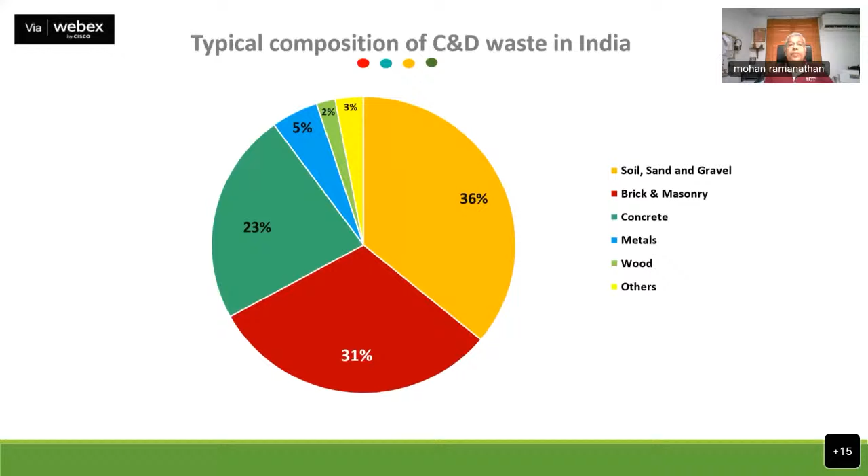Swachh Bharat has also helped, and smart cities have helped. The smart city program also entails that a C&D plant must be established. So you can see a lot more plants coming up all over the country, and they need technology - they start with some technology, but need technology from laboratories like CSIR to make them profitable. This is not a great business venture unless the government pitches in for certain things; it may not be viable for the market value of these products.

I'll explain these points. I'm promoting the use of small recycling plants in India. We don't need very large investments - our volumes are low, so you need a set of equipment which is listed here. They are small capacity. Item number 4 is the key machine, which is 50 to 100 tons per hour with a magnetic separator - this is what we need in small plants.

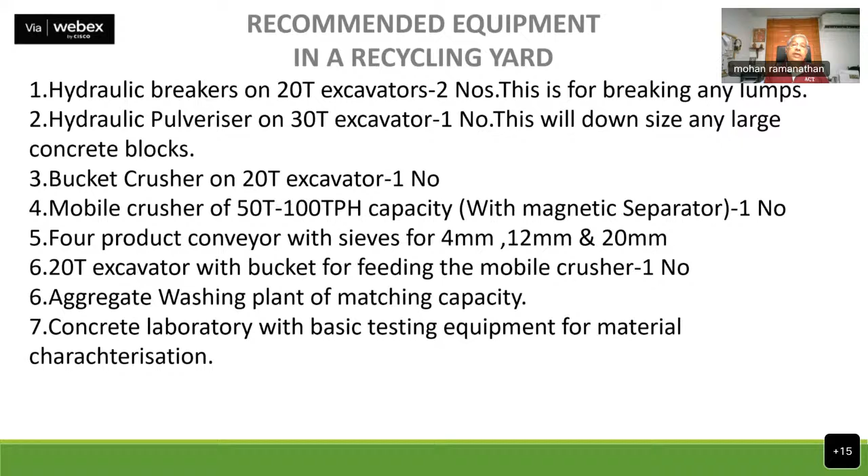So we have to go for secondary breaking in the plant using breakers and pulverizers, and the mixed debris has to be processed through the mobile crusher. The mobile crusher, which I will show in the video, takes in raw material of about 300 to 500 mm lumps of concrete. Then the concrete is processed through the mobile crusher and segregated depending on what sizes we'll sell - we can have coarse and fine.

In South India, river sand cannot be mined, and river sand is scarce, so most people prefer manufactured sand. Straight from the coarse aggregate, from the lumps, it is converted into fine aggregate, so we don't have to tackle the problem of adhered cement mortar on the aggregates. Otherwise that's a big issue because it increases the cement demand.

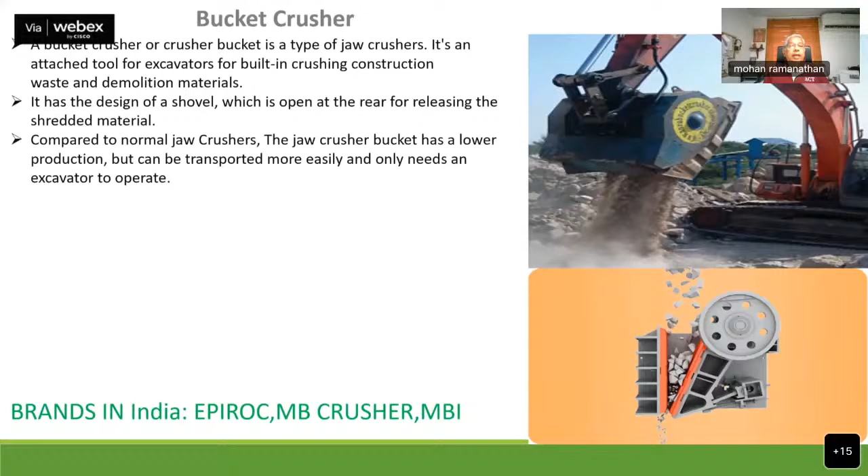Here you see there are many plants, many brands of bucket crushers that I talked about available in India, and there are specific advantages in each.

Can somebody mute? So bucket crushers are very effective, mounted on excavators, and they can do small amounts of... can you all hear me? Just get a confirmation. Yes, sir. Okay, yeah.

So these bucket crushers are mounted on an excavator, and these are simple, inexpensive equipment, and you can start with this type of equipment. This is a hydraulic bucket crusher. These crushing buckets, as they're called, can vary in size, volume, capacity, and intake size. The jaws can be adjusted to produce what the customer needs as the end product.

Then we have the mobile bucket crushers, and we move on to the mobile crusher brands available in India. Mind you, they're all servicing the granite industry and the aggregate industry. They have to change the models a little bit, modify the machines, and they can handle C&D waste. So these simple machines are already available in India in the quarries.

We have to note they may not have magnetic separators for steel, they may not have the products we want. But these are the common and most famous brands available and serviced and sold in India, so there is no dearth of machinery. Of course a few issues like dust production are being arrested by dust suppression systems built into these machines.

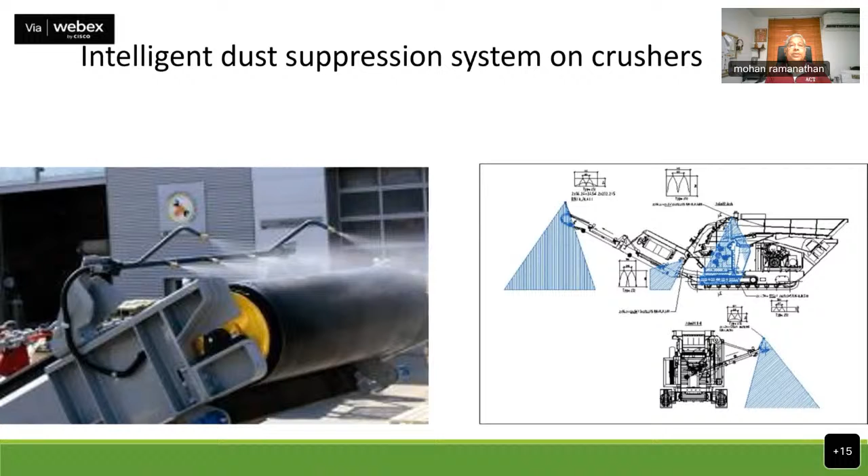So today we have three types of crushers depending on the end product: jaw, cone, and VSI. I'll not go into that, but if you're going for manufactured sand from your C&D waste, you should go for a VSI system - that is VSI, vertical shaft impactor.

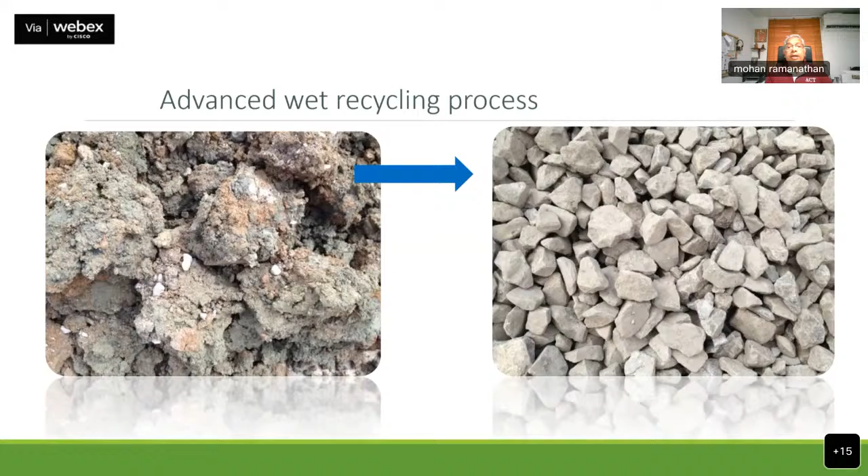So the extracting of the aggregates - I'm short of time already. I just want to show you one video. What you see on the left is the raw material, and what you see on the right is the processed and washed material. And this is the aerial view of a mobile recycling plant with a washing system.

So you can have three products of coarse aggregate and two products of fine aggregates, all coming from the plant. It starts with loading the crusher here, loading the mobile crusher, and then washing it here. These plants - I told you there are more than 20 plants working in India. It's not new. We also can have a simpler type of washing system.

So I have a short video to show you, which will explain the demo we gave for Chennai Metro Rail, where about 30,000 piles are going to be installed. We wanted to educate them that pile heads can be recycled because it's pure concrete and it's quite simple. Here you will see a mobile crusher with the separator system.

I'll not run the whole video for want of time. This is the mobile crusher. This is a 3-part screen, and this is the after - you can see it yourself.

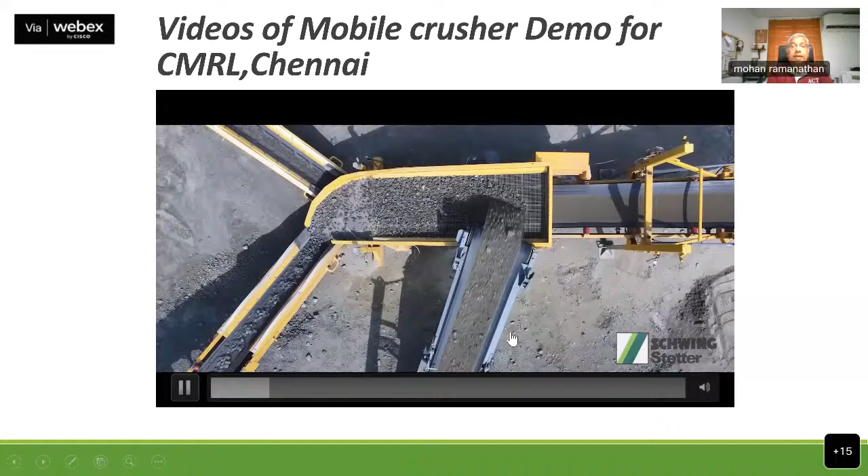This was a demo in Chennai for the Chennai Metro Rail. This is a drone video, and the target was to ask them to give the pile heads - about 30,000 pile heads - for recycling. This has to come in the specifications of the tender. I'm also talking to Engineers India for a very large refinery in Rajasthan, where about 50,000 pile heads are available for recycling, and they are very keen to introduce such measures.

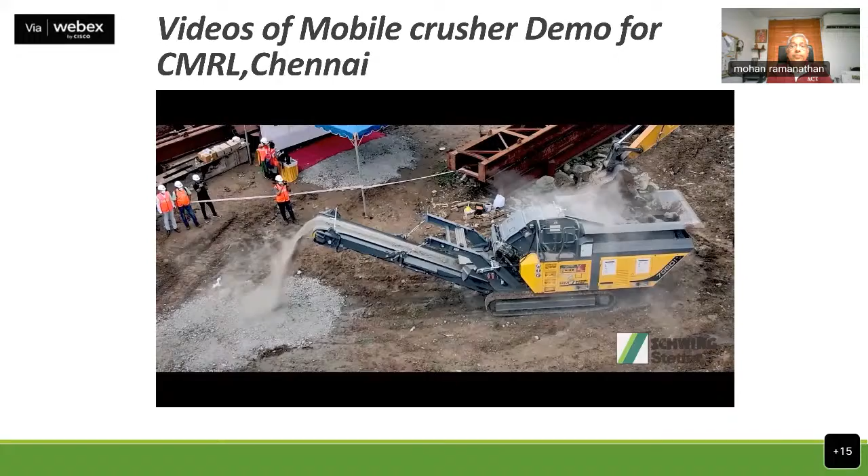So this is a simple mobile recycling plant, 70 tons per hour. It's fed by an excavator, and then the products are separated by screens, 3-part screens. So this is the three-part screen where three products come in.

We'll stop here for want of time and move to the next slide.

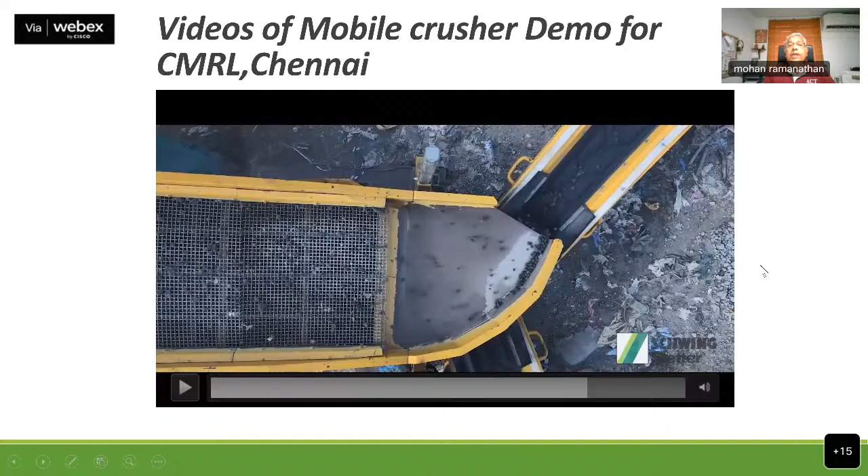Now a little bit about the modifications to IS-383. IS-383 for aggregates have been modified to adapt the C&D waste material. The two terminologies are RCA, recycled concrete aggregate, which comes from concrete, or recycled aggregate, which is mixed with brickwork and blockwork and all that. The code is very clear about it, and now enables contractors and consultants to use it.

In India, there is a lot of hesitation to use this kind of material mixed with virgin concrete, but it's possible. A large amount of demolitions are happening across India, and wherever I am involved in large projects, I'm trying to promote, first convince the owner and then the RMC plant to use this as per the IS code. This is a large demolition done in Cochin, Maradu, where we recycled almost all the materials into some products, maybe blocks or washed aggregates.

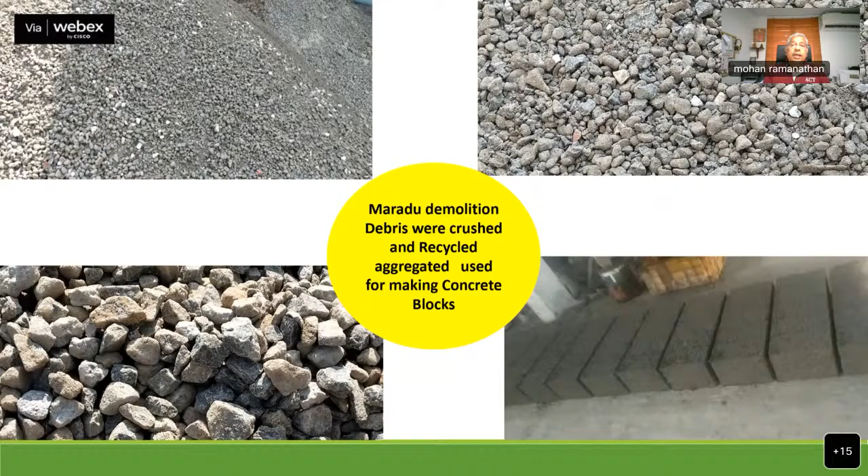So there are many uses for this, and it's all in the literature. In India, CRRI is already using it as sub-base. The plants in Delhi are using them for many non-structural products. But I'm yet to see structural products coming out, which as per IS 383 allows them, or as per the Government of India rules, which are very clear.

So we can use it as a road sub-base very safely. We can use it for low strength concrete. These are the things allowed, and we can use it as sub-base for sports facilities. And we have enough guidelines.

There are guidelines and books published by many organizations. Indian Concrete Institute has its guidelines. Building Material Technology, BMTPC, has their guidelines. Pollution control boards have got their guidelines, all addressing the C&D waste scenario. So it's only a question of the consultants and owners accepting it.

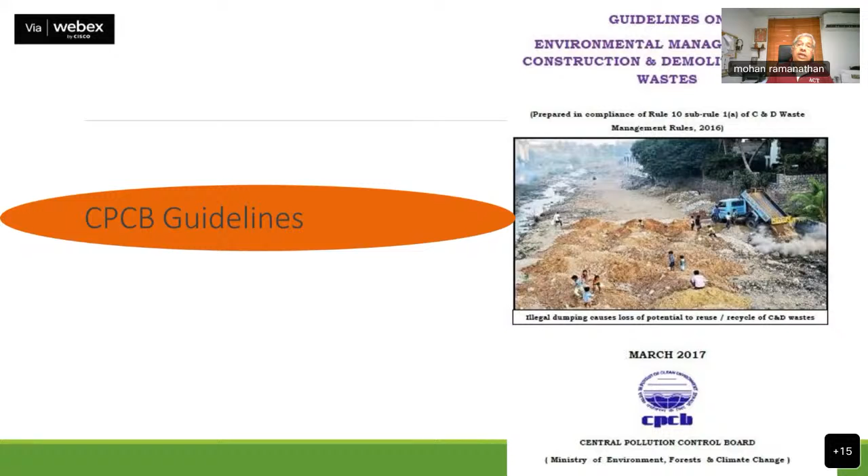And if it's a non-structural concrete less than M15, we can use 100%. So you can go through the code yourself. The code has enabled this very clearly, so we must take advantage of this and go forward.

And some of the applications we can use the recycled RCA or RA aggregates for, there are plenty of them. I've already exceeded 5 minutes of my time, but it's impossible to cover this subject in 15 minutes because this is only a plenary talk. I'll see if I need any other important slides.

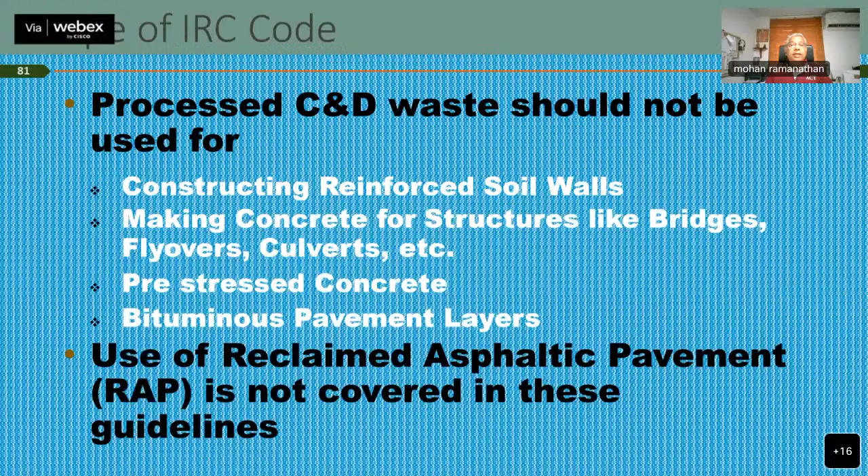Yes, in India, I have seen a lot of landfills being made on good fertile lands being covered with this. So we should stop this. We should use this material back into our system. And our rivers are getting choked. We are learning this, so the careless use of this material by the public and contractors, people from our own industry, we need to stop.

And we have a solution. The laboratories represented here have solutions, but there must be a way to take it to the public. There's enough research going on. CBRI Roorkee, I know personally, have done a lot of research on this. So there is no dearth of technology, no dearth of material, no dearth of equipment, no dearth of government trying to push it. But it is the consultants who have to specify this in real practice.

This is a problem which is going to be there, which is the adhered cement on the aggregates. So this is the Burari plant in Delhi.

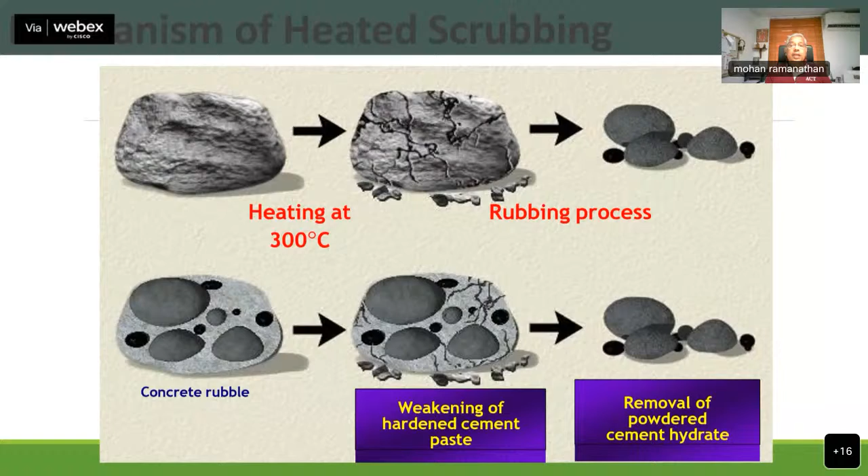So we should proudly display our products like they do in Hong Kong and other cities. This is from the Burari plant in Delhi. So there are a lot of success stories in India itself, but we need more of it.

The Parliament building has used it, CPWD have used it in the Parliament building here.

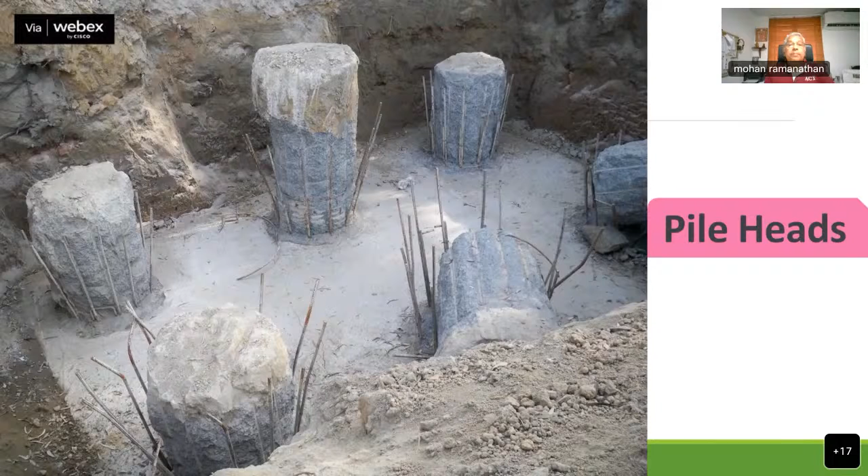sustainability. This is an important thing: we have to make sure that the energy that we have in the C&D aggregates is put to use. So these are the energy sustainability numbers of how much we pollute the atmosphere and how the recycled aggregates can reduce to a certain extent the pollution and the carbon emission from our systems.

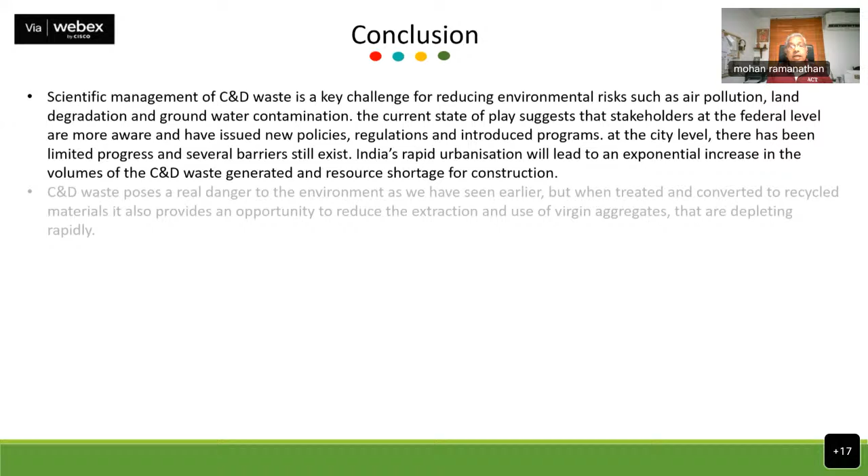So there are a lot of benefits of recycling. We quite well know that, and now I think we should scientifically manage this. Otherwise, it can go in the wrong direction also. A few collapses of buildings using C&D waste will simply kill all the things that we have done so far. So with this, I will stop my talk, and I will say this is not the end. It's only a beginning of recycling.

You mentioned that C&D should not be called a waste, but it is a resource. So I think it's a very good message that you have given to all of us. And you have also highlighted the importance of several such materials like RCA and RA. Our next speaker will also highlight some of the works that they have been doing. I see Dr. Santa Kumar and others, those who have been doing work in the area of construction and demolition waste as a resource. Thank you very much, sir.

Once again, Dr. Ashok Kumar, should I move forward with your permission? Okay. I can't hear you, but yes, okay.

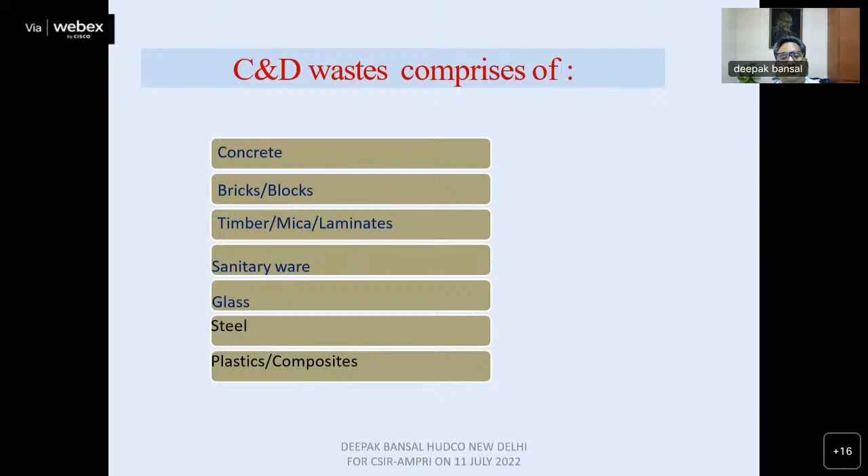Generally, construction and demolition waste comprises concrete, bricks, timber, sanitary ware, glass, steel, and plastic. And we know from the previous presentation that most of the construction and demolition waste is brick, blocks, soil and concrete. Delhi generates something like 6,000 metric tons of municipal solid waste, which is too high. So with waste, we can reduce it, we can recover it, and we can recycle it.

Generally, the present status of solid waste disposal is that either it simply lies on the site, or it is dumped in the open, although this is not allowed. It is sent to landfill sites, or dumped on eco-fragile zones like riverbeds and water bodies, which further contaminates the environment.

Now, different researchers have given the volume of construction and demolition waste. For new construction, somebody says 5 to 25%. For repair and renovation, somebody says 10 to 25, 30%. And the major part of construction and demolition waste comes from demolition of buildings.

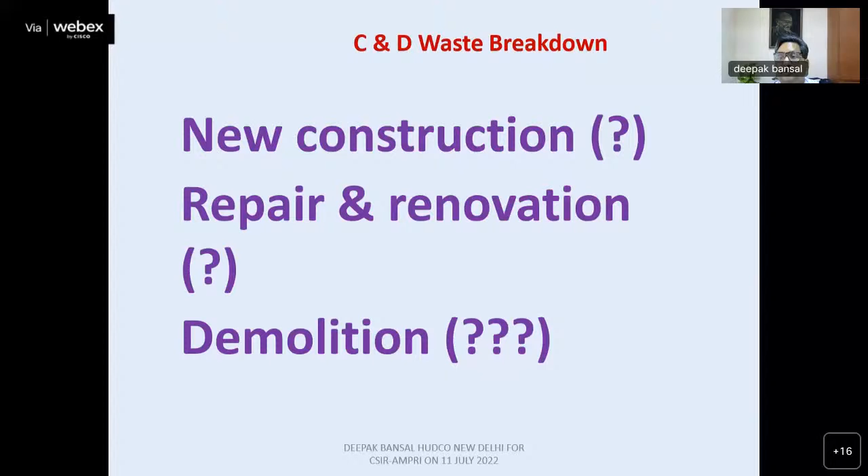But the traditional knowledge available in the Indian building industry is to recycle it using the local people. Like in Ahmedabad, what is happening? In the pol, all the heritage features in the buildings like balustrades, railings, doors, and window members are being recycled and sold. And they are fetching good value, and they reduce the load on construction and demolition sites.

The percentage of solid waste has already been discussed in the previous slides. So I believe that reduction of construction and demolition waste can be done by efficient planning of construction, if we can reduce the wastage and pilferage of materials like bricks, soil, sand, aggregates, and steel. Normally the percentage of wastage in steel is 2%, but in bricks, soil, sand, and aggregates it is 5 to 25%.

Now the Indian code has allowed replacement of natural sand with manufactured sand up to a certain percentage, depending upon the qualities. The same is for coarse aggregate also. Now I have come across some people in Ahmedabad and Maharashtra who are making surkhi bricks. They are taking crushed brick powder, sand and aggregate, putting some lime, gypsum or cement in that, and making the bricks.

The performance of these surkhi bricks, although they are not much known outside, is much better. The crushing strength generally is about 50 kg per centimeter square, which is the dry crushing strength.

And the water absorption, the weathering, the toughness, the surface finish are also good. The replacement of virgin steel with recycled steel is also now prevalent. I believe that steel industries are recycling 10 to 30, 40% of steel in making the new steel. So this reduces the consumption of raw materials, as well as reducing the cost and embodied energy of the new products. The performance of this steel can be made as per the desired level.

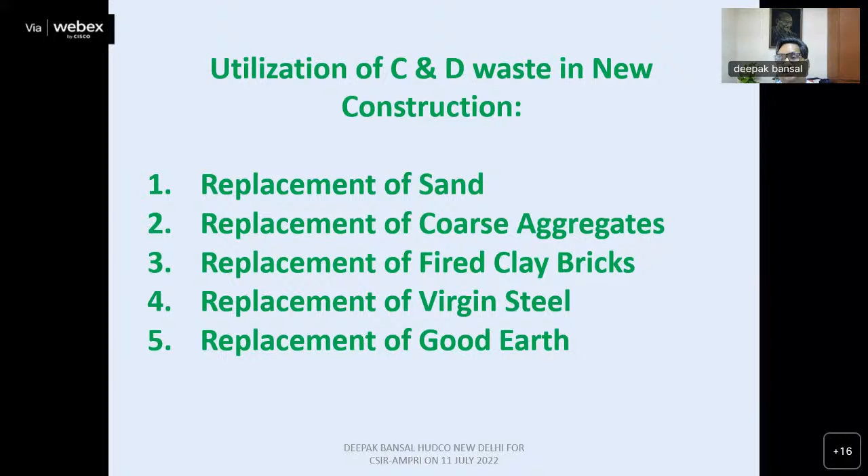Some new products are being used, and at my personal level I have used products from other waste, not construction and demolition waste, but sometimes agriculture waste also. I've used sugarcane bagasse ash bricks in Nagpur. VNIT Nagpur is doing good research on that topic. Bricks from rice husk and bricks from red mud have already been experimented with a lot, and have been used partly where raw materials like bauxite mines or iron mills are there.

Recently, I came across municipal waste sludge and pulp and paper waste being used to make bricks. IIT Guwahati has done some work on this topic, and they are in the process of recommending an Indian standard on that. The performance of the brick made from this municipal semi-solid waste is found to be good. Bricks and partition panels from phosphogypsum have been used for a long time. Construction and demolition waste is largely being used for making tiles, and they are very good in that.

But the trouble is that, from my personal experience, people are not very comfortable using them. I do not know why, because the performance of these products is much better, but probably because of limited supply or limited sources or locations. So maybe transportation or logistics may be an issue. So people are not using it the way they should have by now.

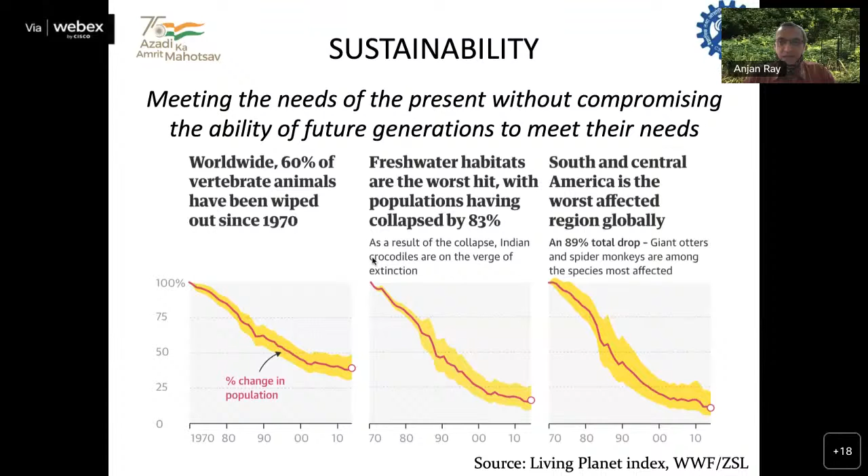Very simply, sustainability is about meeting the needs of the present without compromising the needs of the future. And we have not done very well as a planet. 60% of the vertebrates that were there in my childhood in terms of species are gone. And the two basic rules, that we should not harvest things beyond the regenerative capacity, and we should not deplete non-renewable resources without substitution, have not been well maintained so far. These are very simple rules. If we keep them on our wall, as I do, and every morning you look and see whether all the work that we do is aligning to these, you can actually get a more sustainable planet.

The core issue is overconsumption. Whatever the earth needs versus whatever is actually extracted is poorly balanced. So, you can ask the question, does anybody need 29 pairs of shoes or 30 shirts? And then you start seeing that maybe the answer is no. But for everything that you overconsume, there's an overconsumption load on the 4 basic natural resource blocks that the world deals with. And in 250 years of progress, we can see that every parameter has gone up. So as we have measured GDP progress, we have also extracted resources well beyond what the earth can sustain.

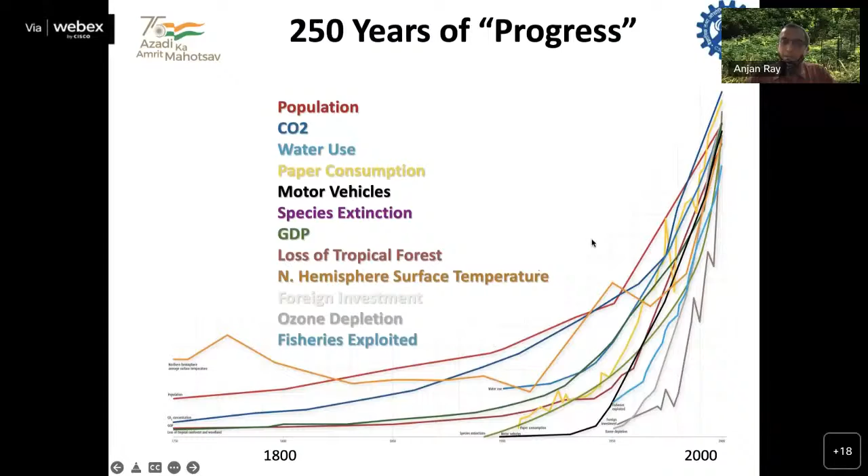So if I look at this from an Indian imperative, and I use this phrase resource efficiency, which I encourage all practitioners of waste to wealth to examine, it's simple mathematics. Can I get more output from less resources or more output from given resources? And that is where all the work that's been talked about this morning and all the 4 technology presentations that will follow me will focus. But as we measure the resource efficiency, we will be able to choose which technologies are better and which ones are worse. For example, when we do crushing, it's a good thing that we're recycling. But if I'm using a lot of fossil energy for that crushing, then maybe we need to re-examine that part of the recycling value chain.

We've talked about these 4 basic material resource categories. Today, we are mostly in the non-metallic block. But with things like red mud, we might also be in the metallic block. We should remember where we are in terms of our achievements, and also keep measuring at all times how we are doing against these metrics. In particular, the abiotic resources are not used for energy production. And also for everything we are doing on the resource recycling, reuse, etc. side, we might be consuming water and other things that we must be attentive to, because we should not create another problem while solving one problem.

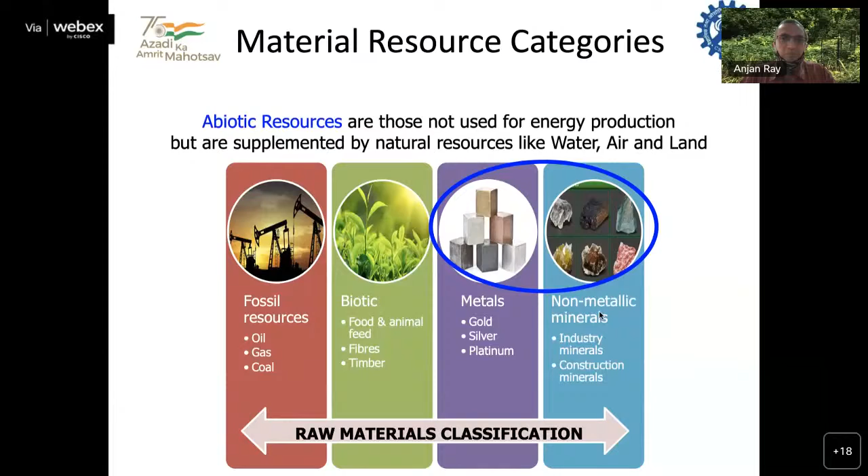Another interesting issue is that when we overconsume, no matter how we overconsume, we overuse machines. So in a very simplistic way, we can say that machines enhance greenhouse gas emissions because no machine is 100% efficient. We've learned from class 7 physics that all machines have less than 100% efficiency. Therefore, in theory, a lubricant is a fighter against climate change. Does every machine, including construction machinery, demolition machinery, JCBs, hammer mills, are we using the best lubricant? That itself is an important consideration for managing the footprint of our emissions. These are the things that I would like to draw your attention to.

What we heard from Dr. Anandavalli was about resource efficient recycling. She gave the example of red mud. What we see in the building industry is we've moved away from buildings that look nice. You know, they're all glass fronted, sun facing. Today, we first look at functionality. How do I make the building functional? Then we look at adaptive aesthetics. We have moved from thinking of buildings and communities as energy hogs to thinking of them as energy generators. Planting trees, not only for landscaping, but actually for sequestering carbon. And like I mentioned, renewable energy to drive machinery and using bulk inert inorganic wastes, not so much in landfills, but as carbon capture reactants.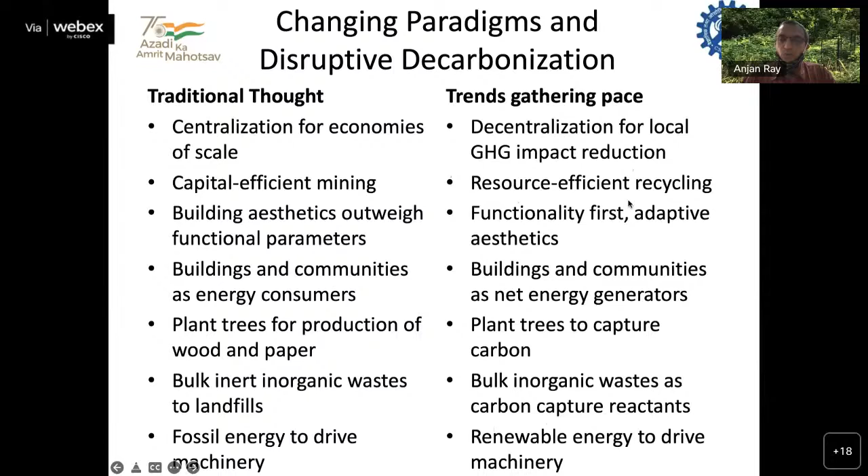If we are able to achieve all these different things that we're talking about and foresee a future where we not only reduce, reuse, and recycle, but we do so responsibly and in a resource efficient manner. So I'm adding 2 R's to those. We could potentially leave behind a more sustainable world than the one our generation has inherited.

Saying that, we will recognize that sustainability is an imperative, it is not an option. And if we start thinking of wastes as underutilized resources rather than wastes, we get a better position on sustainability. We also need disruptive thinking. Only incremental thinking will not get us there.

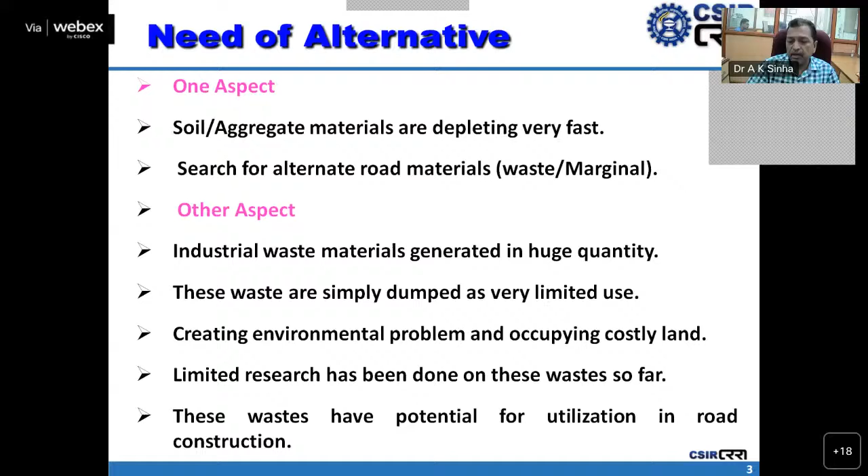So in one aspect, due to large infrastructure construction, soil and aggregate materials are depleting, and we have to search for other alternative materials. On the other hand, copper slag waste material has potential as a road construction material. Presently, it is partly utilized in road construction and partly simply dumped near the industries. Some barriers and challenges are persisting, which hinder the application of copper slag as a road construction material.

There are no proper guidelines as per MORTH guidelines, or even any construction methodology. Performance and durability data regarding the materials are not available in documented form. There is even a lack of skill, lack of knowledge of the performance of engineering materials, lack of awareness, all persisting, which hinder the application of copper slag materials.

So a broad sequence of studies was carried out in the laboratory as well as in the field. First of all, it was examined whether it is a hazardous or non-hazardous material, and it was found that it is a non-hazardous material. Then engineering properties were determined as per the standard procedures accredited by the Indian Roads Congress. After that, a pilot study was carried out and 3 years performance was monitored, and based on that, guidelines as per the IRC are under the development stage.

So copper slag was studied as an embankment material or as a subgrade material, without mixing with other materials, or with stabilization, mechanically stabilized with soil or pond ash, as a replacement of soil.

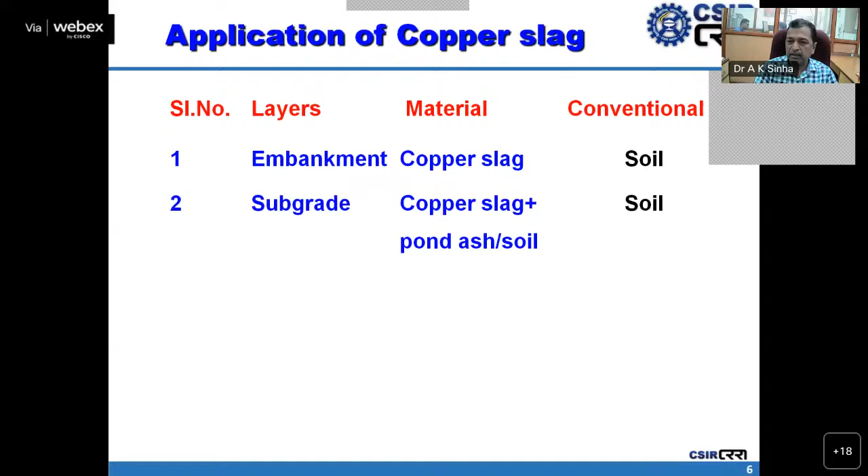Pertaining to road construction materials in application of embankment or subgrade, properties like grain size, liquid limit, plasticity index, dry density, free swelling index, CBR, and shear strength parameters were determined for embankment and subgrade application. The whole methodology was bifurcated into two stages: laboratory studies and field studies.

In laboratory studies, complete physical, chemical, and geotechnical parameters were evaluated, then to improve the properties mechanically and chemically, it was stabilized with cement or as soil materials. After getting all parameters, design and stability analysis of the embankment was carried out, and based on that, a pilot study was carried out using copper slag as embankment material, followed by economic analysis and 3 years of performance monitoring.

Physical and chemical analysis like SEM and XRD were carried out. These are the SEM photographs, showing this is a coarse grained material.

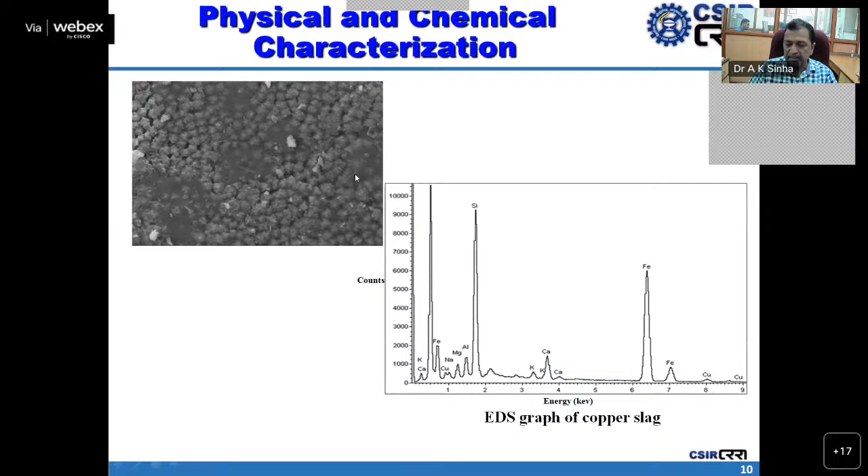So it was blended with pond ash in different percentages from 25%, 50%, 75%, and it was found that after blending with pond ash, density reduces slightly with the addition of pond ash.

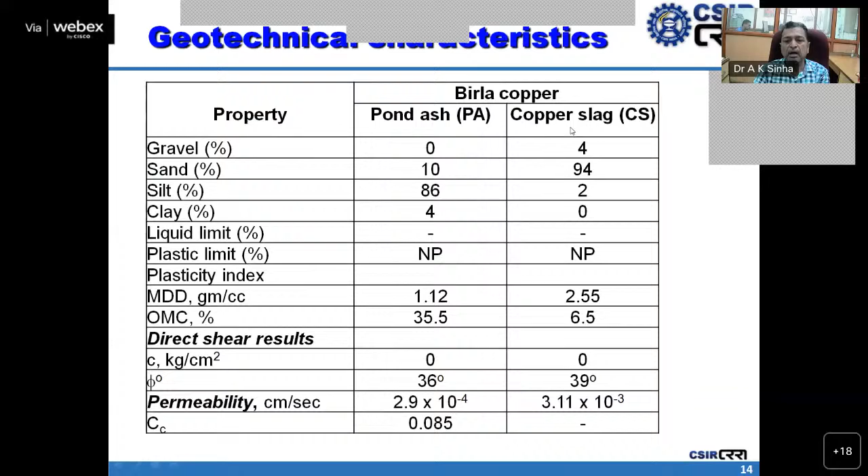Copper slag was also blended chemically with cement in different proportions, 3 to 9%, and it was found that UCS value increases with curing period as well as with cement content. These are some of the properties of pond ash and copper slag collected from Birla Copper Industries.

At the ROB, on the right side copper slag was used as embankment material, and on the left of the ROB, the embankment was constructed using conventional soil materials. Both approaches, 500 meters each side, were used for the experimental test section.

This is the existing site condition on the left hand side, and this is the right hand side before the construction of the ROB approach road.

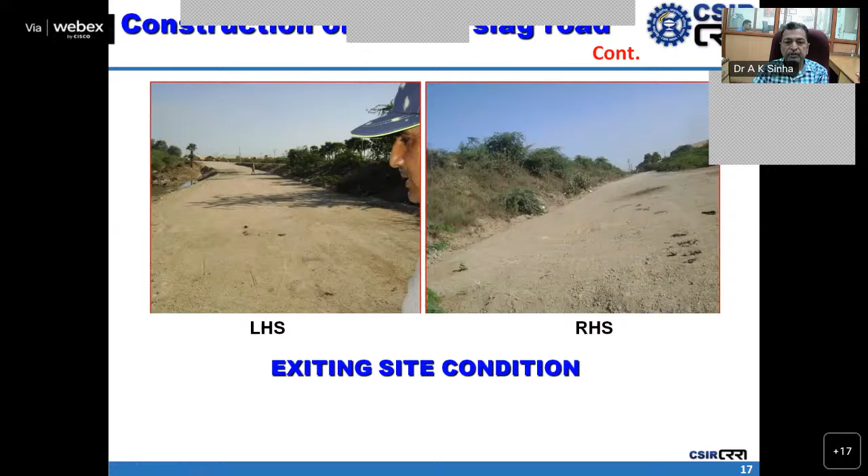In one approach, copper slag was stacked, then spread and rolled out, and you can see one layer compacted here. But when a loaded truck plied on this for the second layer, under the wheel the copper slag was seen to segregate.

So it means we examined how the technical parameters pertain to subgrade and embankment material, but practically it was found not to be feasible as is.

So to increase the cohesion between particles, it was decided that it would be blended with soil or pond ash materials to increase the cohesion properties.

For mixing of copper slag and locally available soil, different indigenous equipment like tractor-tow disc, tractor-tow fowler, and grader were used to determine the efficacy of mixing. It was found that the tractor-tow fowler is efficient and mixes properly.

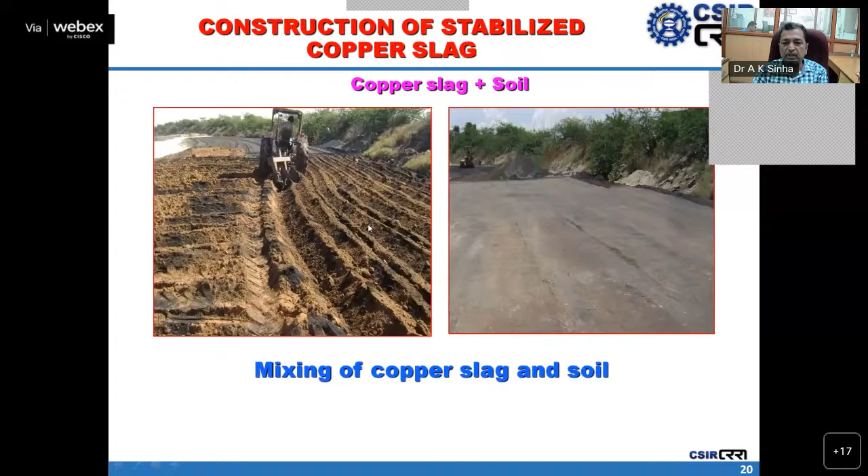This is the pictorial view of the copper slag mixed with soil during the mixing operation, and after compaction, these are the pond ash copper slag layers. The whole construction was done using copper slag and pond ash.

This is another view - you can see it is a frictionless material. So to protect the slope from erosion, locally available soil was used to protect the slope of the copper slag fly ash embankments. This is the existing ROB approach road.

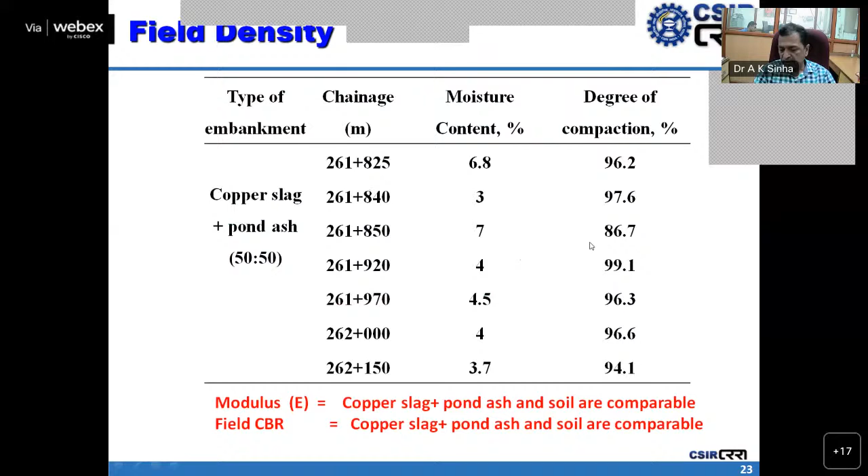During the construction, layer by layer, each layer's density was measured, and it was found to be coming more than 95% as per the IRC guidelines.

During the construction, the modulus of the embankment layer was also determined using plate load test, and field CBR was also determined using the DCPT test.

After the whole construction, performance monitoring was carried out by measuring different parameters like roughness, deflection, and settlement.

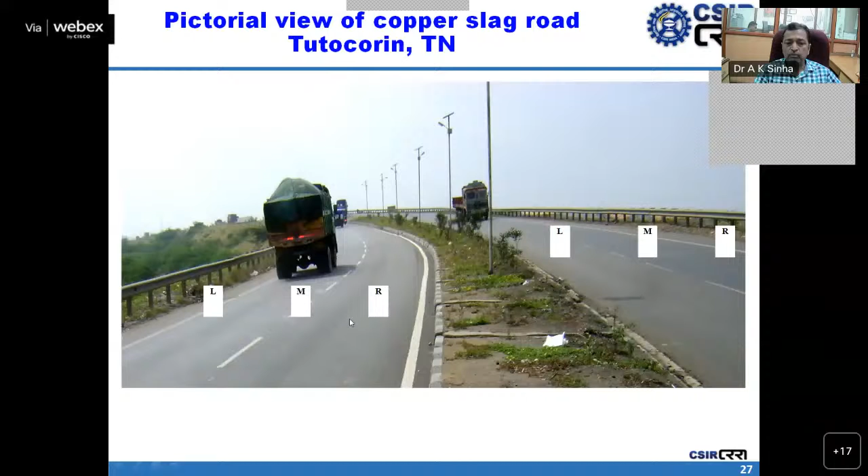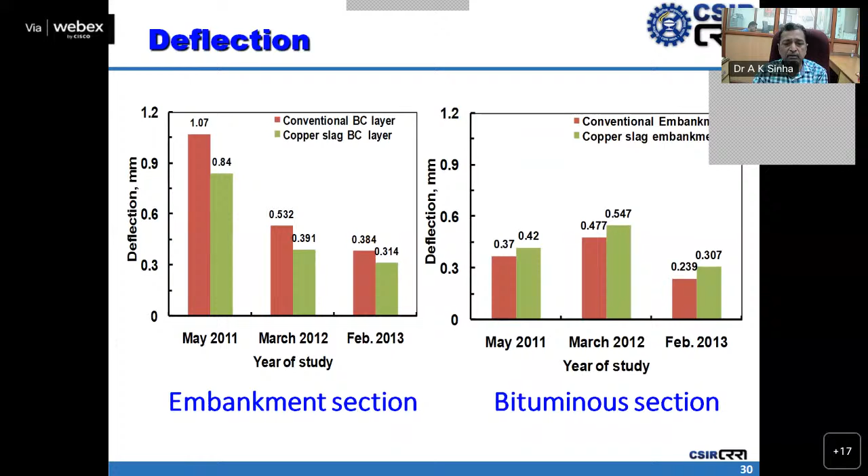Settlement was measured time to time at middle, left, and right also. After the whole construction and performance study, economic analysis was carried out considering different parameters, and it was found that around rupees 2.75 lakhs can be saved for 2.5 meter high embankment construction.

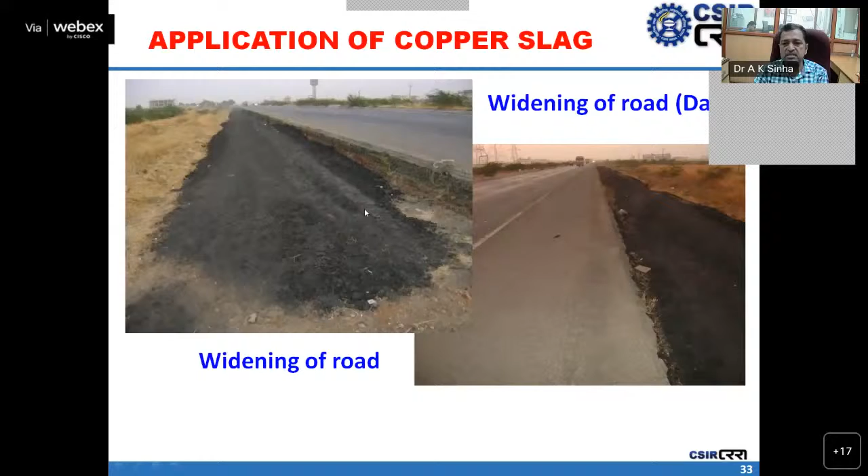Now copper slag is being used as road construction material. This is a pictorial view of the copper slag application at the widened portion near Dahej. After that, I received a SKOCH Award in 2018 based on this study.

From this conclusion, we can say copper slag essentially should be blended with locally available soil or pond ash for application as embankment material or subgrade material. Mixing by tractor tiller is practicable and economical. Pond ash needs to be laid first before the copper slag layer, and deflection and roughness parameters of copper slag embankment are similar to conventional sections, so it can be used as embankment and subgrade material.

Already IRC SP 121 guidelines for use of iron, steel, and copper slag have been developed, but only for rural roads. For highway construction, it is under development, so the printing may be finalized in 2 or 3 months. Thank you, this is my presentation.

Thank you, Dr. Sinha, for your wonderful presentation. I'm sure this is one of the very good examples of research from lab to land. We always say that technologies developed by scientists are being utilized in the field. Dr. Sinha has very nicely given the example of a national highway, the Madurai-Tuticorin Expressway, and appropriately mentioned the usage of copper slag with pond ash and soil. One of the recommendations of his outcome is that copper slag must be mixed with soil and pond ash, used for both embankment and road construction.

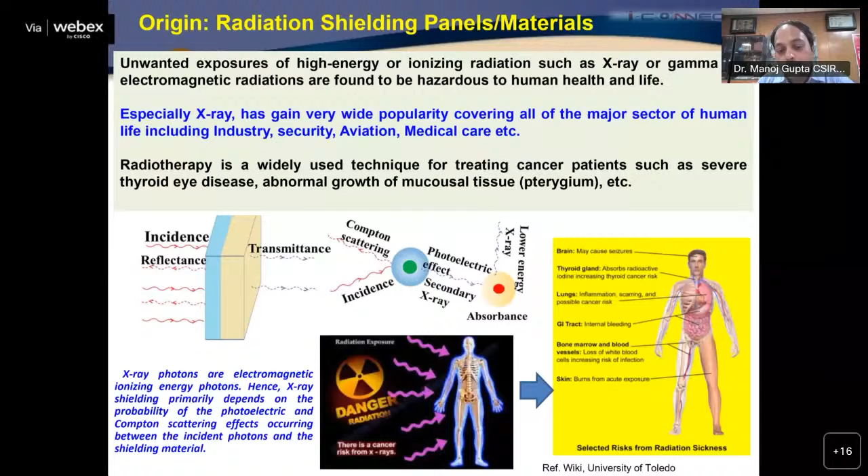So we need to immediately find some kind of material that must be lead-free. Presently, what is happening is we are using lead. Why? Because it has a high atomic number, high density, and also good linear and mass attenuation factor. But it is very toxic and also very costly.

Making these kinds of lead panels requires a high energy, high temperature process. And also when we use lead panels, they have a brittle nature. So after 1 or 2 years, a lot of fractures are created that again cause unnecessary exposure to radiation.

So every 2 years or 1 year, BARC or AERB must visit the respective X-ray room to validate whether this lead is working currently or needs to be replaced. So we need to find an alternative to the lead-based panel.

Lead glasses, doors, or aprons are mainly based on lead materials. Other materials are also available like tantalum, bismuth, tungsten. These kinds of materials are also utilized to make panels, but they are very costly and have a metallic nature.

Another drawback is that sometimes when more than two different kinds of metal oxide mix with polymer materials, it requires proper mixing to have better interfacing at high temperature. A cement-based concrete with a very thick volume is used to protect against X-rays, but it cannot be used as a door or panel and also exhibits high water absorption.

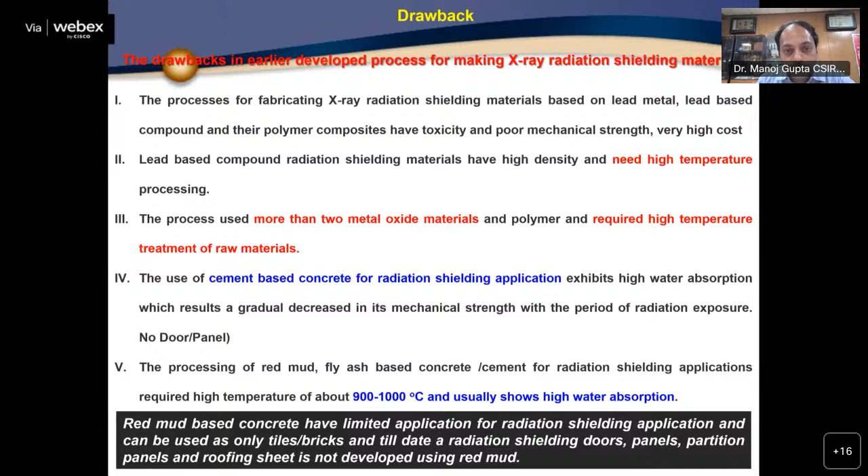With this aim, we have developed X-ray radiation shielding doors and panels with very low water absorption and high strength capability. We have measured the half value layer, which is a primary requirement to validate whether the product has X-ray radiation shielding property or not. High tensile flexural strength with low thermal conductivity was obtained in our developed technology.

To develop this technology and product, we have utilized red mud, which we all know is a solid waste produced in the process of alumina generation from bauxite. More than 13 million tons of red mud is generated from many industries like Nalco, Hindalco, Vedanta.

Most of the red mud contains more than 30 to 35% iron oxide. Once we produce alumina from bauxite, we need 3 tons of bauxite that produces 1.3 to 1.5 tons of red mud and just 1 ton of alumina. This means waste generation is very high, and it is always an alarming issue.

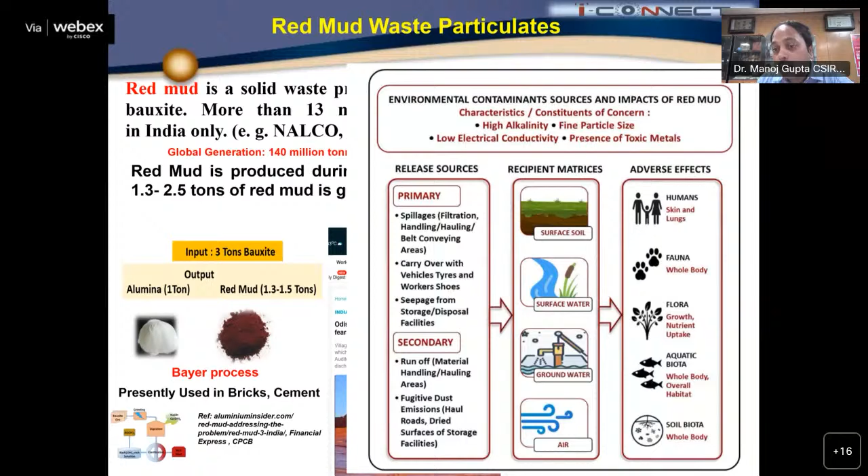Generally it is just disposed outside, and only a small quantity is used in cement or bricks. In villages near red mud generation sites, a lot of diseases occur, like skin and lung issues affecting the whole body.

So before producing our developed product, we did initial characterizations on the red mud. We performed X-ray diffraction and found that it has hematite and gibbsite phases. We also did WD X-ray fluorescence spectroscopy to find out the elemental analysis.

We come to the conclusion that iron oxide is 33.9%, then alumina, titanium oxide, sodium oxide, and the particle size of this red mud was in the range of 0.5 to 150 micrometers, and it has a density of 1.2 to 1.8 grams per cc. And you can see the water holding capacity is also more than 30 or 40%. It means once it is disposed of in open land, it can transfer ions from soil to the water and also to agricultural land, which creates other problems.

So after a lot of optimization and surface modification of the red mud through the compression molding machine and other processes, we have developed these kinds of blocks. You can see this is the size of 10 centimeters by 10 centimeters, also 4 centimeters by 4 centimeters, with a thickness of 1 mm, 2 mm, and 5 mm. We have developed this kind of product, which has very low water absorption and high mechanical strength.

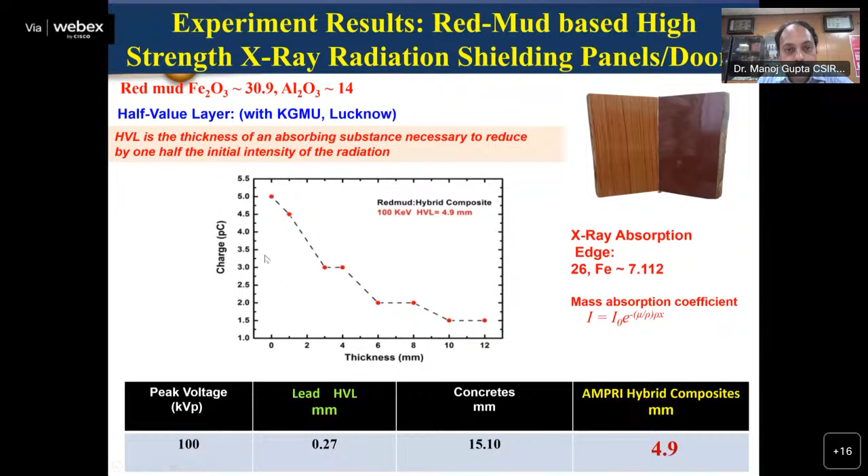Then another parameter: if we use other metal oxides with very high thermal conductivity, then scattering is another problem. When X-rays interact with any metal, different kinds of scattering occur. So our material must have low thermal conductivity. You can see that the thermal conductivity of the board is in the range of 0.55 watts per meter Kelvin, very low thermal conductivity. It means it has thermal insulating properties.

And also the dielectric constant, whether it is electrically polarizing or not. The dielectric constant is also very low, about just 50, meaning the chances of polarization are very poor. So it means better X-ray radiation shielding properties. Most of the X-rays are absorbed within the material without producing a lot of secondary X-rays. And the density can reach up to 1.8 grams per cc.

Now, to validate whether iron oxide or titanium oxide has the capability to protect against X-rays, we fabricated two panels, one with marble waste, which has calcium-rich phases, and one with iron-rich phases. In the case of the marble waste panels, we don't get any HVL, meaning very little energy is dissipated. But in the case of the red mud, the energy is absorbed. It means the iron is the main reason.

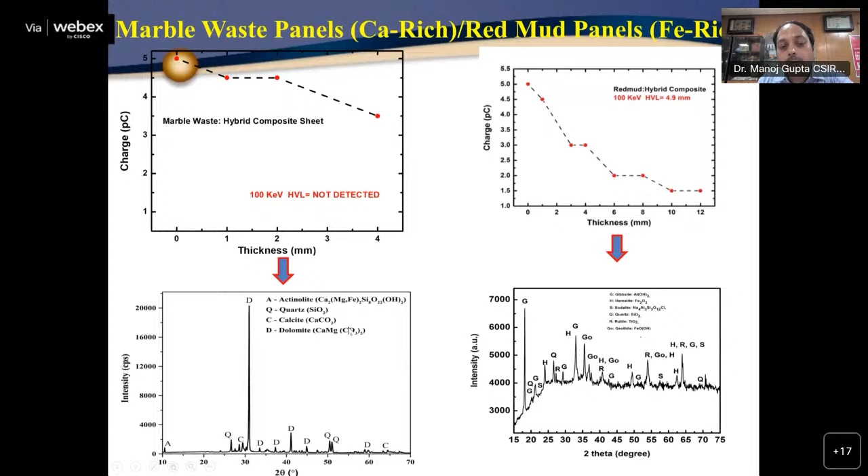And if we compare the X-ray diffraction patterns of the marble and the red mud, we can see that the marble waste has the dolomite or calcite phase, which does not have the capability to absorb X-rays. But here we can clearly see it.

Now, to practically utilize this product, we have signed an MOU with King George Medical University, Lucknow, to test and validate the product under real-time conditions. So we signed the MOU with KGMU, and our product has also been tested at different laboratories. And recently we also got a patent on this technology, published online in the US and other European countries, with the help of the doctors' team at KGMU.

Now, the surface aesthetic properties can also be improved. Red mud has a reddish color, so if you want a better look, different kinds of skin materials can be utilized using natural fiber. The shape, texture, design, size, and thickness can be easily tuned to get smart X-ray radiation shielding panels. And most importantly, it is not brittle. No fracture will occur even after 10 years. We have also done weathering tests of this product under different UV conditions, raining conditions, and high temperature conditions.

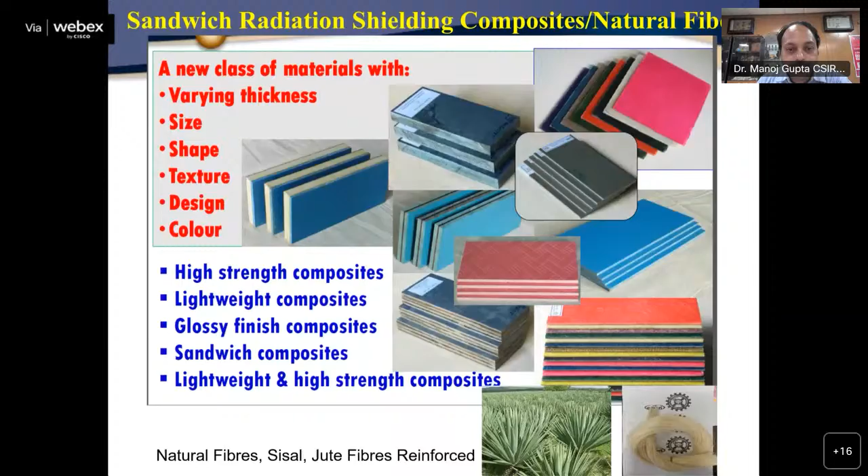And natural fiber can also be utilized to increase the tensile or compressive strength of the product. And another patent we also got in this area. Now we have successfully done the upscaling. Pilot scale production of this product we have done to perform the real-time testing at the X-ray room.

So we can see that the size of the board is 2 meter by 1 meter and the thickness is 25 mm. So a full scale door is developed in our lab, and this door is having the water resistant property. It is purely eco-friendly and non-toxic materials, and strength is very high. No termite attack can be possible, so the brittleness and other fracture kind of things we can easily avoid. And it is having the thermal insulating property, chemical resistant.

We have done the mechanical study even after pouring the product in the acid and alkaline media as per the ASTM standard. And also electrical insulation property this board shows. So this is the product what we have developed in our lab. And there are a lot of properties associated with this technology, like salient feature, low temperature fabrication process: within 100 degrees centigrade temperature we can develop this product. Otherwise lead is having more than 1000 or 900 degrees centigrade processing.

We can develop a joint free board, ceramic free material, and this is a polymer based board, so the thermal insulating property can be sustainable for a longer period of time. And fire retardant properties it is having. It is highly suitable for the hospital and the X-ray room, and it is having very economical and environmentally friendly properties.

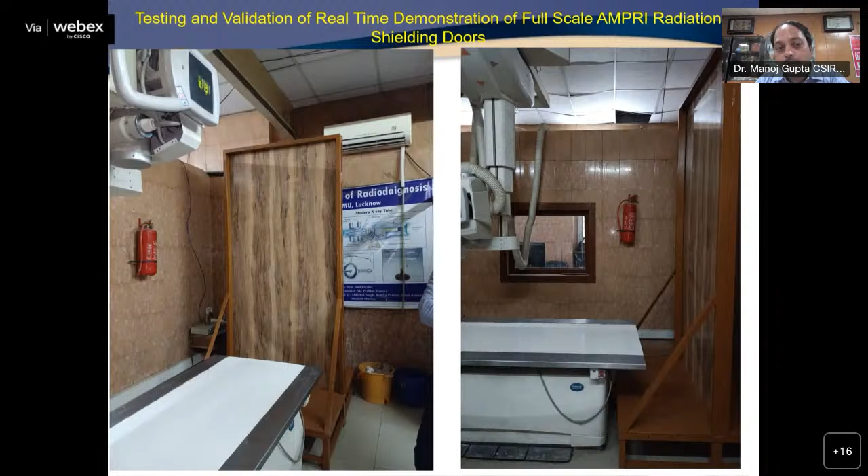Now to validate this product, we have developed the full scale radiation shielding board, and we have tested and installed this board at the King George Medical University for real time testing and validation. We can see this is the sandwich panel of the red mud board, and this is fixed on a stand where, when X-ray is passed, the detector is kept on the other side of the board, and the detector detects how much X-ray is coming to the other side of the board. So the testing is in process in real time at the King George Medical University.

This is the uniqueness of the product. As I already discussed, it is durable, high strength, corrosion free, fire retardant. And also in the mobile clinic, where X-rays can be installed, our panel can be installed in such kinds of mobile clinics also. In airports also, we can see a lot of X-ray screening rooms are there. And we are also working hard to publish some papers in such areas.

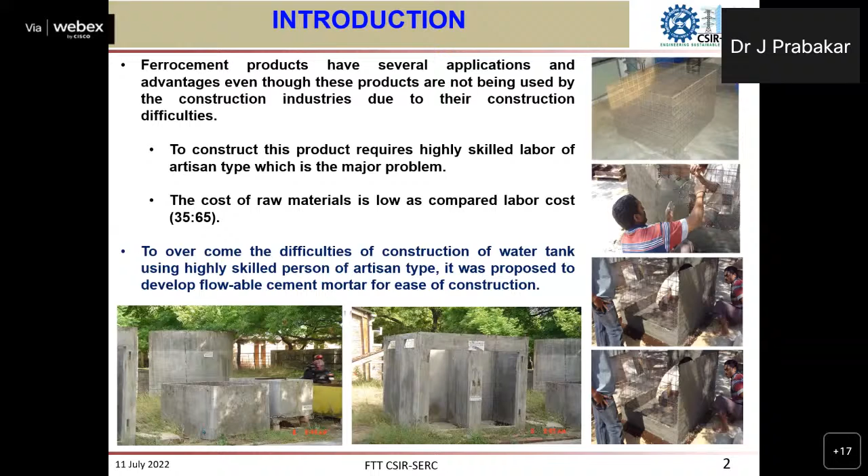So considering the material aspects, as I said, it is very strong and durable. So what we thought is, why not simplify the process? See, the construction is the difficult one. If we simplify the process, we can use the product in a better way. That is what we thought.

So as I said, the objective is the development of a methodology to construct thin water tanks by modifying the cement mortar to be flowable, to achieve the following benefits. One is to overcome the demand for highly skilled artisan-type persons, and second is to reduce the cost of the water tank.

If you follow the traditional method of construction, the labor part itself takes more than 65% of the cost of the water tank, and only 35% is the material aspect. So if we come out with a simplified construction technique, we can substantially reduce the cost.

So for that, we have developed a mix. This is the cement composite: cement one part, and fly ash, or you can go with GGBS. About 50% of the material is used both as a supplementary material and as a filler. We used fine aggregate, and we also used a viscosity modifying agent, so that the consistency and uniformity of the mix are not disturbed.

And one main thing is, since we are making the composite flowable, we see that there should not be any shrinkage, because it's a thin member. By making the composite flowable, we see that there should not be crack formation. And also, while making it flowable, we have not compromised the strength.

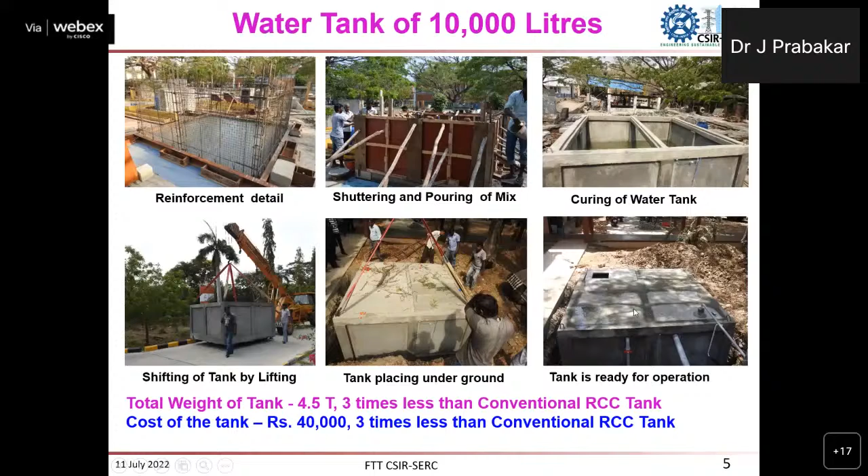And this water tank we developed, suppose we go for housing, there it is very much useful. So we can construct this water tank just as I described. Simply, with the help of a crane, you can keep it in place wherever you are going to keep the water tank. But suppose some people may ask, if an individual person wants to buy this water tank, whether it is feasible.

So you could say it is not feasible, because keeping this water tank in any individual residence is costlier, because you need a crane to be engaged. So to overcome that, we have come out with precast thin segmental panels. In a water tank, there are 4 sides and the bottom side. So 5 panels are involved, for the 5 sides.

What we did is we have come out with the joints. So you see here, this is a jointing system. Particularly in precast, leakage is the most important point. So we have developed this jointing system in such a way that if you just arrange the panel like this and pour the concrete here, it will not allow the water to leak. So like that, we have developed this precast water tank. These are all separate panels. You can see here, all these panels are separately cast, including the bottom panel.

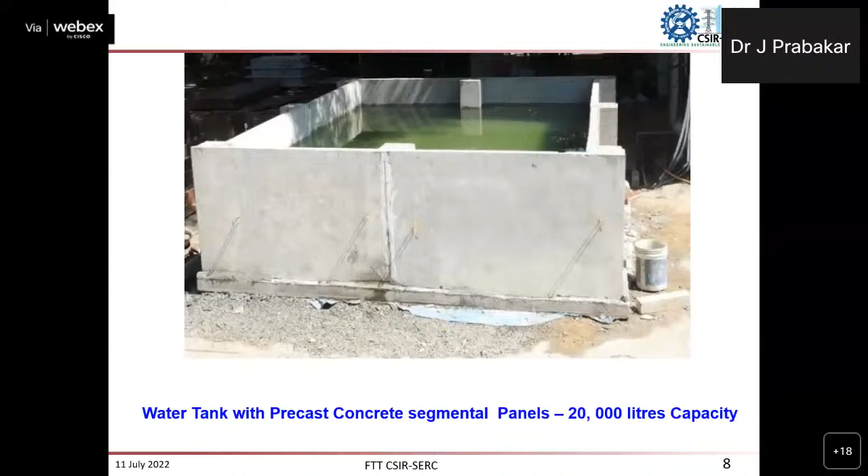And suppose somebody wants to have a septic tank or a sump. If you follow the traditional methodology, it will take at least a month's time, minimum. But if you use this kind of methodology, the same day the sump will be ready. That is the advantage. And there is a lot of saving, because in such tanks the shuttering is the most important cost involved. Here there is no shuttering, because all the panels are cast at ground level, so you need not spend money on shuttering. That is the beauty of this technology.

So if we compare this water tank with the traditional water tanks available in the market, like a Sintex tank, I can conclude that our proposed water tank costs only 2,677, whereas heavy duty Sintex tanks cost 8,000 rupees and so on. And we have tested it. We lifted the complete water tank and checked whether there is any leakage. So we have gone through all the studies. And of course, it's cost effective.

It is also addressing the sustainability issue, because we are using 50% fly ash in the construction of this water tank. It's lightweight because it's very thin, only 1 inch thick. And as I said, we have modified the construction methodology. Anybody can construct this water tank; you don't require any highly skilled artisan. So a lot of advantages are there.

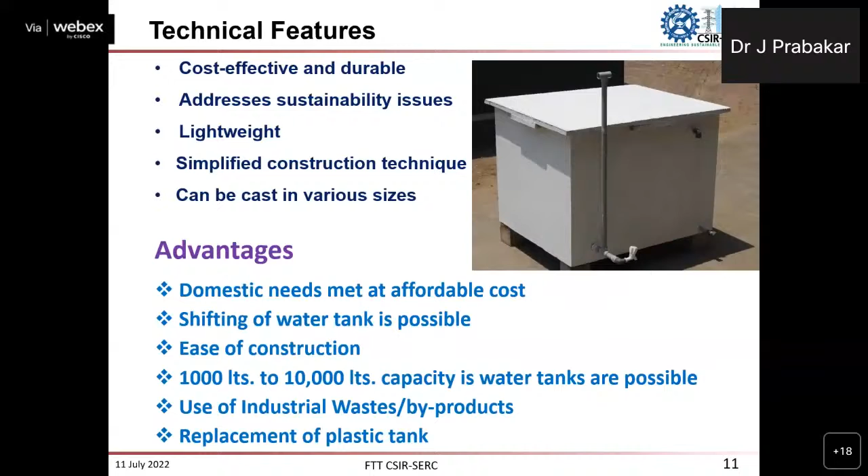It can be shifted from one place to another place. It is easy to erect, and it can scale this construction from 1,000 liters to 10,000. We can keep adding the modular panels, so you can get the capacity you want. So it is a replacement for the plastic tanks available in the market.

So this technology is already transferred to one industry in Hyderabad. And mainly this is very good for the societal need, where the water is to be stored in a better way. So that's all about this technology.

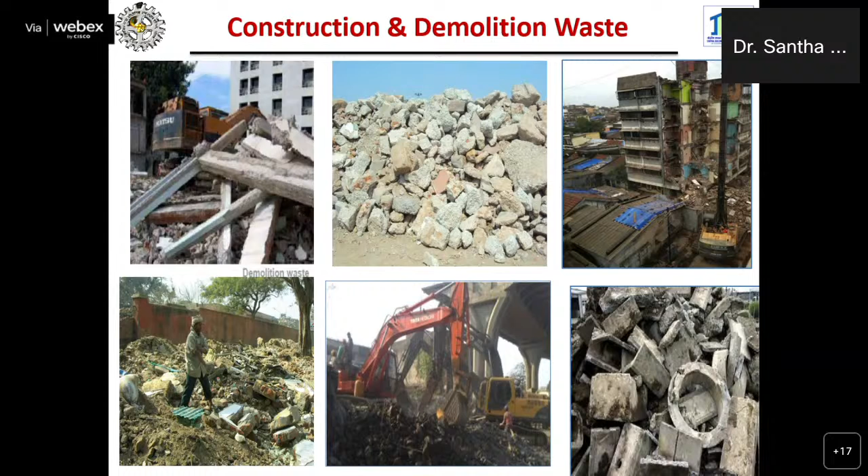As the keynote speaker and plenary keynote speaker have covered almost all the basic introduction of C&D wastes and their production process, I just want to go directly to the technical aspects. Next slide. These topics are covered by the keynote speaker. Next slide.

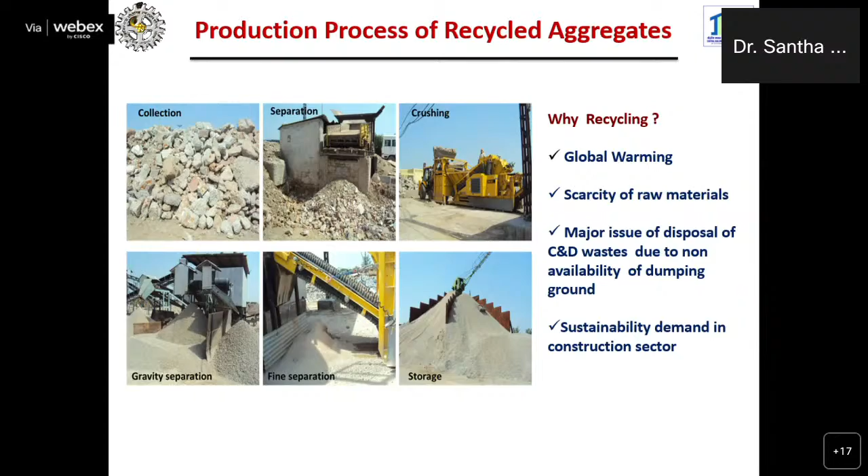So, as we already know, concrete waste and masonry waste are the major portion of construction and demolition waste. Aggregates extracted from concrete waste and other demolition waste are generally called recycled aggregates. This is usually a porous material with high water absorption capacity and low specific gravity. The existence of cement paste in recycled concrete aggregates forms a weak, porous, and cracky layer, and they usually have poor grading.

The grading is mainly influenced by the type of crushers we use. If we use a laboratory jaw crusher, we get a certain grading. If we use commercialized crushers like jaw crusher, impact crusher, and cone crusher, then in such a case we can improve the grading.

IS 383 already suggests that it is suggested to utilize recycled aggregates 100% in concrete for making lean concrete, but it is suggested only to use 20 to 25% for making plain cement concrete as well as reinforced cement concrete. So our motto is to use 100% of the recycled concrete aggregates for making structural concrete. In these aspects, at CBRI we are working on this for the last decade.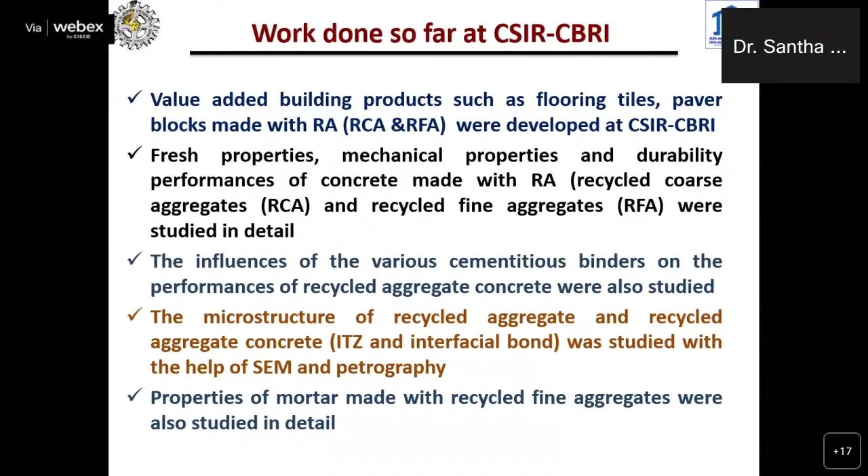Next slide. Okay, and apart from that, some other - I think you have crossed two slides, go back to the previous slide.

We have also studied the structural behavior of reinforced concrete made with recycled aggregates under static loading, and we have proposed various methods to quantify the amount of adhered cement paste to identify the quality. The quality is mainly influenced by the quantity and quality of the cement paste present on the surface of the aggregates. I will come to the treatment process in coming slides.

Various treatment methodologies have also been proposed to improve the quality of aggregates, and properties of bricks made with recycled powder. Generally whenever we are making recycled aggregates, more than 10 to 20% is a byproduct coming from the recycled aggregate - material less than 75 microns - which we used for making bricks. We have also used C&D waste to develop various products like C&D waste-based pervious concrete, self-compacting concrete, and permeable film.

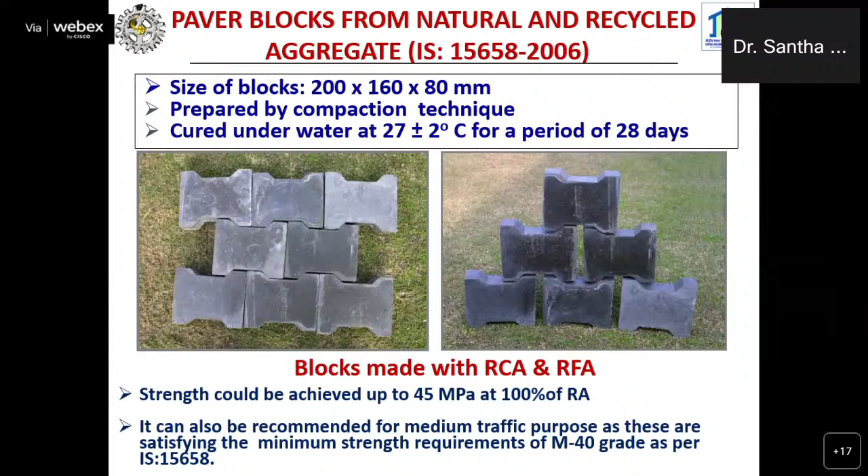These are various building products developed, such as bricks, blocks, tiles, and different grades of self-compacting concrete. After adopting the treatment process, we developed various building products and materials that meet the requirements of the highest standards.

We'll go to the next slide.

These are the field implementations at CSIR CBRI. As already mentioned by our sir, 20,000 paver blocks of size 200mm, 160 by 80mm have been cast using recycled aggregates and used in the pavement of the mass housing site demonstration park at CBRI. The C&D waste blocks are also used for making walls at the demonstration park.

Go to the next slide.

Coming to this, we have successfully transferred that technology, the process know-how to develop paver blocks and other building components from construction and demolition waste. This technology has been transferred to Disha Ecoloc Pavers.

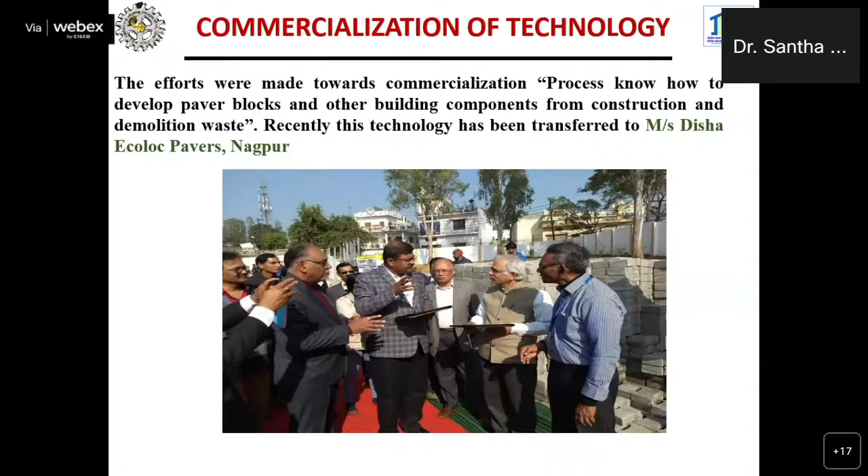Go to the next slide. Thank you. If you have any questions, you can ask.

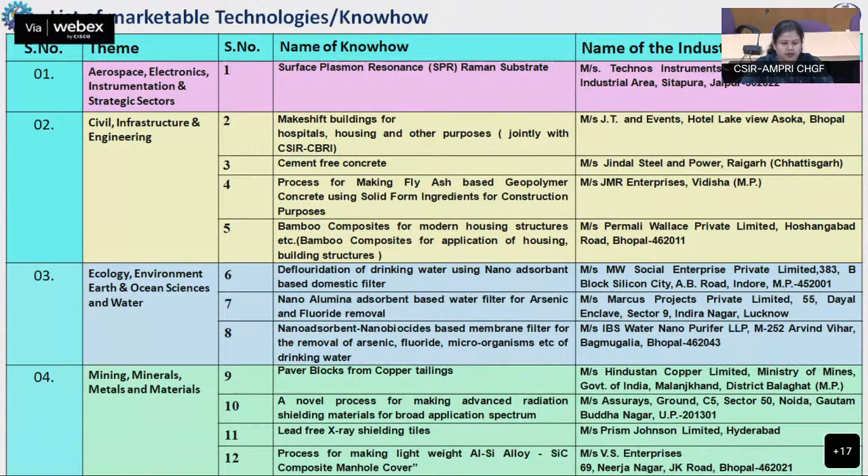These are the marketable technologies, licensed technologies that CSIR AMPRI has developed in different themes of CSIR. All these technologies have been licensed, and they are useful for employment generation and for protection of environment. One by one, we will see all these technologies.

Under the Government of India Make in India program, CSIR-AMPRI has developed, with public and private leadership, a Raman spectrometer.

This is an international standard spectrometer with these features, and it can be utilized in various applications. This equipment has been developed under the New Millennium Indian Technology Leadership Initiative.

Two models have been developed that are available in the market. The first model is the CTR 300 Raman spectrometer, and the next is the CTR 150 Raman spectrometer.

Both these models are available in the market and contribute to the 5 pillars of Atmanirbhar Bharat Abhiyan: economy, system, infrastructure, demography, and demand. Our industry partner recently received 2 orders on this product, and many others are in the pipeline.

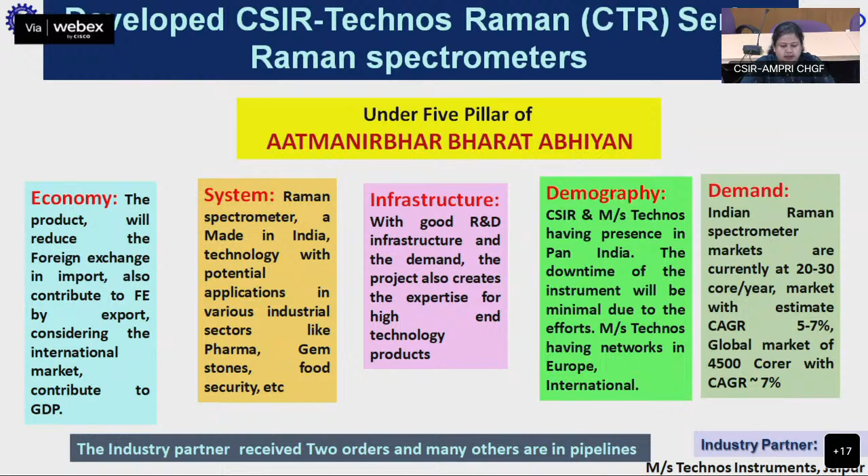Waste to Wealth is one of the nine scientific missions of the Prime Minister's Science, Technology and Innovation Advisory Council.

CSIR-AMPRI has worked a lot on converting different types of waste materials, such as fly ash, marble waste, and other materials like stubble (parali), into useful products, generating employment in the process.

This is the first technology developed by CSIR-AMPRI, for which it received the NRDC Innovation Award 2020. In this technology, CSIR-AMPRI has utilized a waste material called red mud.

By using red mud, CSIR-AMPRI converted this waste into X-ray radiation shielding tiles. These are lead-free tiles, and this technology know-how has been transferred to Prism Johnson.

This is a unique technology that can be utilized in different applications such as X-ray diagnostic centers, hospitals, and clinics.

By using this technology, we can protect the public and the environment from harmful X-ray, gamma ray, and beta ray radiation.

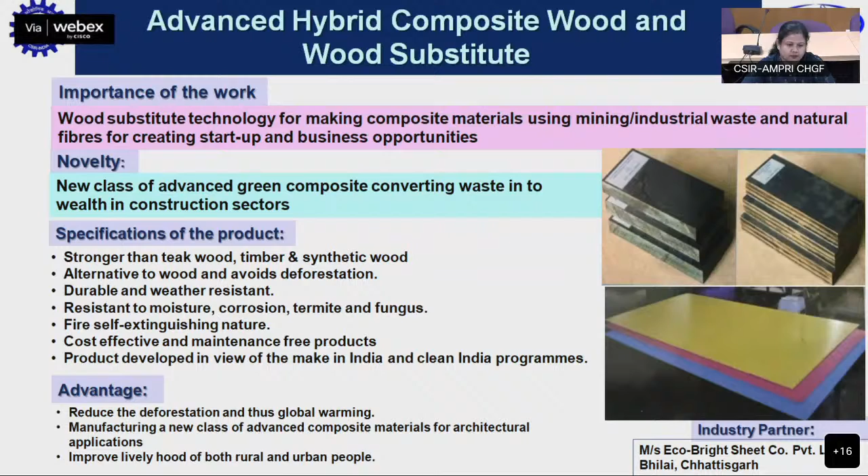Next in this series is the high performance hybrid green composite wood developed by CSIR-AMPRI. This is also a unique technology, cheaper than teak wood, and of better quality.

This composite material can be utilized for doors, walls, partition panels, roofing sheets, furniture, and many other applications.

Next in this series is a technology developed by CSIR-AMPRI from fly ash. This fly ash based material is 4 times stronger than teak wood, about 30% cheaper, and durable and weather resistant.

This technology has been licensed and can be utilized in the housing sector, civil infrastructure sector, transport sector, and by startup industries and makeshift building companies.

Next is geopolymer concrete, developed from fly ash-based advanced cement-free concrete material that serves as a replacement for cement.

By using this technology, we can reduce carbon dioxide emissions, and we can use it for roads. Using this concrete, we can develop high compressive strength paver blocks.

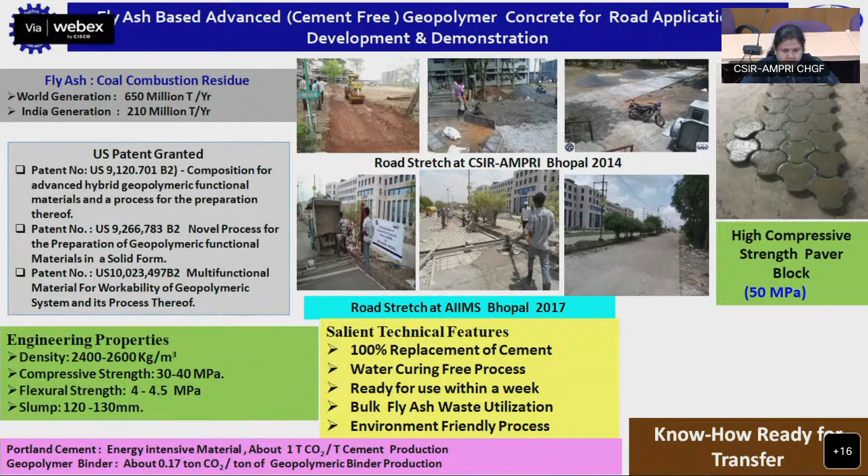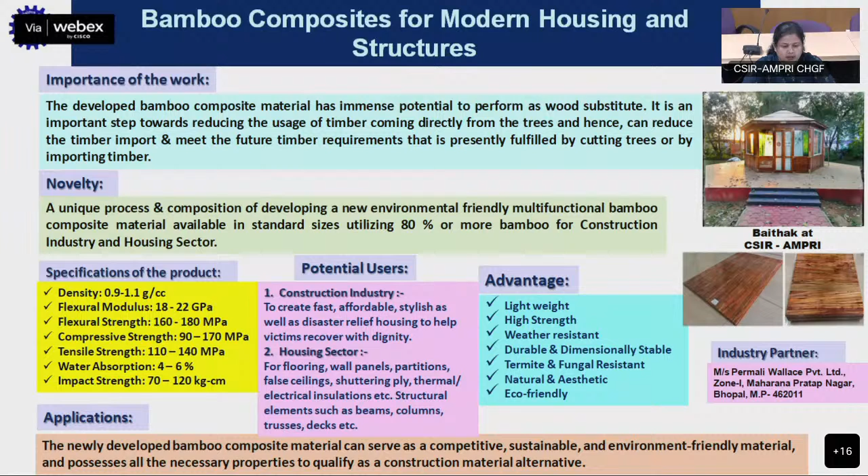Safe water is the backbone of a healthy economy, and in India, as per WHO, there are different parts of the country where harmful components like fluoride and arsenic are present in the water. So to overcome this problem, CSIR AMPRI has developed some unique processes for water filtration. The number one technology developed by CSIR AMPRI uses a nanoadsorbent based filter, and this is an electricity free and gravity based technology that can be utilized for the filtration of excess fluoride.

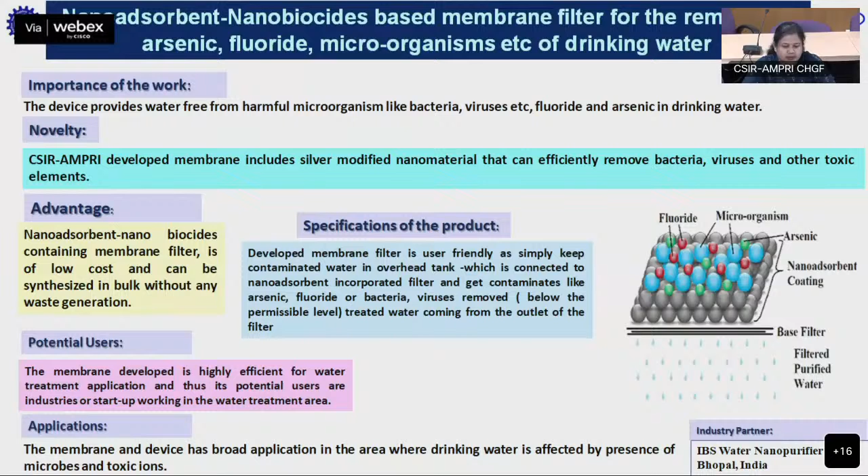CSIR AMPRI has also developed a nano alumina based adsorbent water filter for arsenic and fluoride removal. Our know-how can remove fluoride and arsenic, and it is easy to maintain. No electricity input is required, and by using this technology we can save water. This technology is developed as per the BIS standard, and all these water based technologies have also been licensed.

Despite being an engineering material laboratory, CSIR AMPRI has worked hard during the pandemic situation and developed some unique processes. First is the makeshift hospitals, jointly developed by CSIR AMPRI and CSIR CBRI Roorkee. This is a unique special structure, and by using this structure CSIR AMPRI has completed 2 makeshift clinics during the pandemic: first, the fever clinic at Government JP Hospital Bhopal, funded by MPCST Bhopal, and another fever clinic in Dewas, funded by the District Health Department, Dewas.

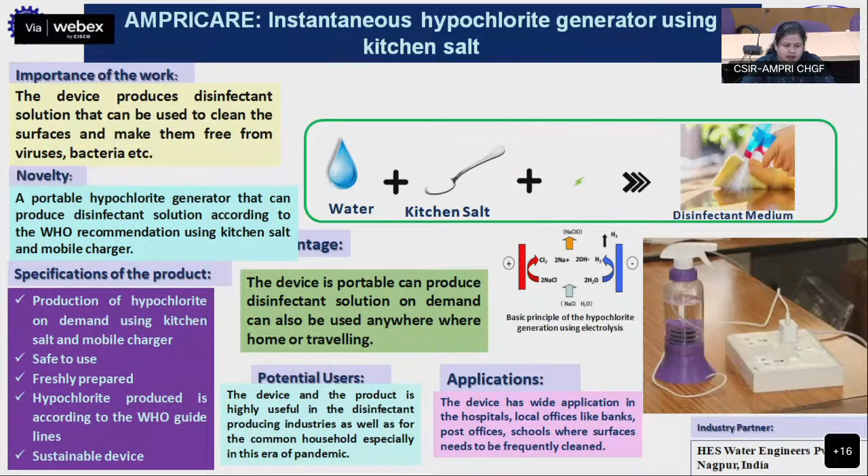Dr. Kirti, can you hear me? Can you wind up? Can you quickly finish, because we are running short of time.

Yes, sir. The next technology developed by CSIR AMPRI is the hand sanitizer for enhanced skin care, developed using aloe vera gel and other useful materials, which kills 99% of germs, and this is confirmed by an NABL accredited lab. And this is the face mask developed by AMPRI during the pandemic situation. And this is the AMPRICARE disinfection box.

By using this device, we can disinfect different types of stationery items, mobiles, and other gadgets and items. It is energy efficient, automatically disconnects when doors are open, is easy to install and maintain, and it is compact in size. This technology has also been licensed.

Another development is the lightweight material. This is developed by CSIR AMPRI using aluminium-silicon alloy SiC composite material, that is the manhole cover, which gives a 67% weight reduction in comparison to cast iron. It is very low in weight and can be utilized as a replacement for cast iron, with comparable strength to cast iron.

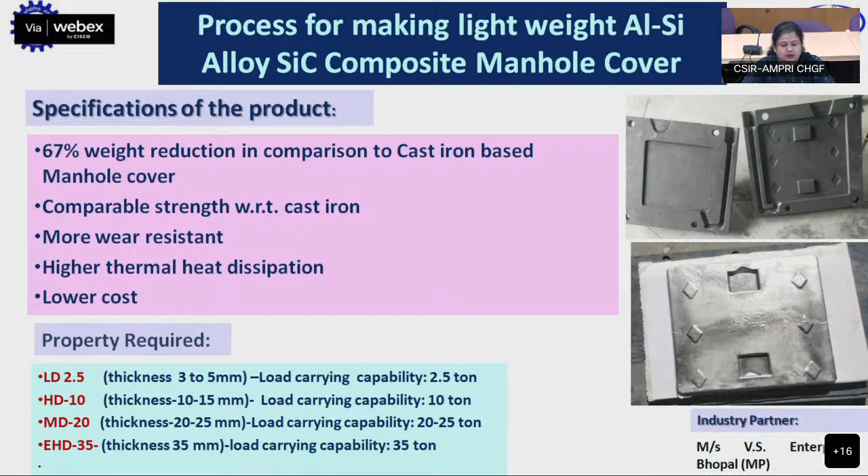These are the different areas in which CSIR AMPRI is working. If any industry or organization is interested and wants to work in these areas, then we can work in collaboration, and you can approach our lab. Thank you so much, sir.

Thank you, Dr. Kirti, for highlighting the technologies developed by CSIR AMPRI Bhopal. Grateful to Dr. Avinash Kumar Srivastava, Director CSIR AMPRI, for sharing all these technologies and information. Ladies and gentlemen, we are really short of time, and we can take one or two questions. Dr. Amit Chatterjee is there.

Can you hear me, Dr. Amit? Good afternoon, everybody. Good afternoon. Yes, good afternoon, sir. Please share your questions. If you have any questions, please.

I had one question regarding the utilization of red mud as a radiation shielding tile. It's fantastic work, highly innovative, and the way the problem has been resolved and the details shared, I really appreciate that. I hope industry will be able to take it further forward. There are issues like how big the market for this radiation shielding tile is compared to the quantity of red mud generated in the aluminium industry. Maybe from the industry side we should do homework to find out, and then put a proposal before you to take it further forward.